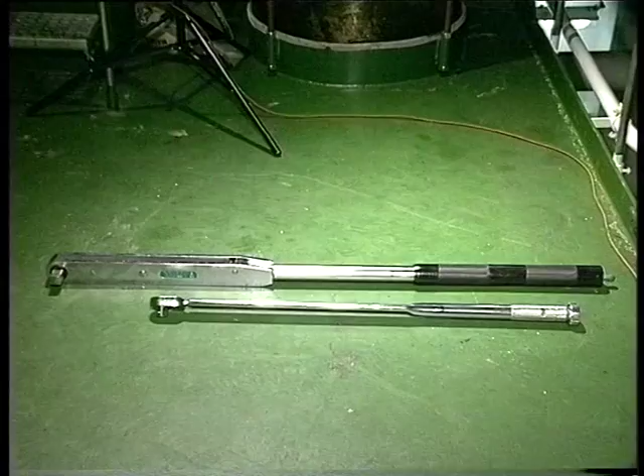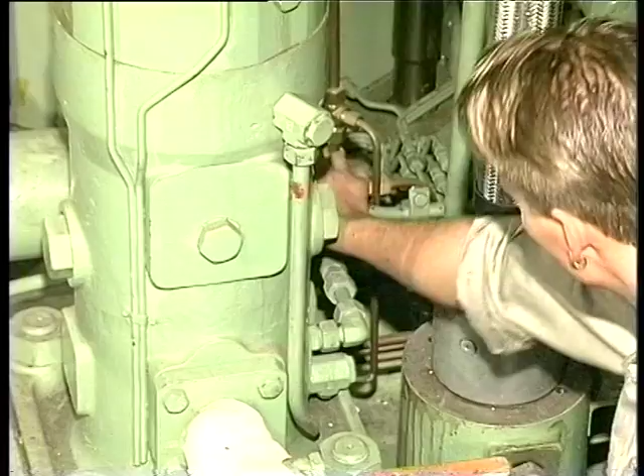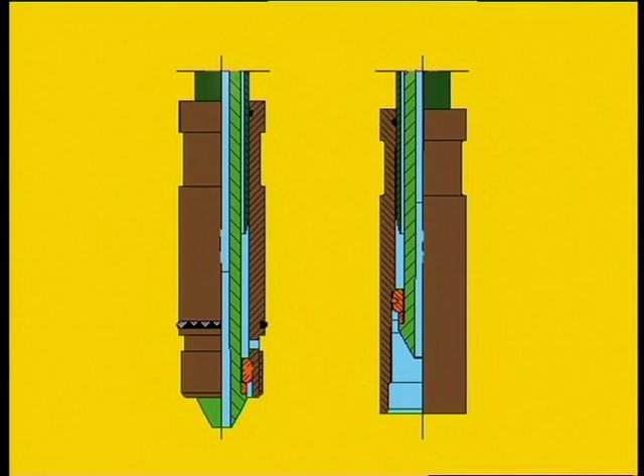Before any dismantling, drain the fuel oil from the fuel oil high pressure pipes. Confirm that the oil flow has stopped before continuing. The fuel oil high pressure pipe may be provided with a protective outer pipe or with flexible steel wire braided hoses.

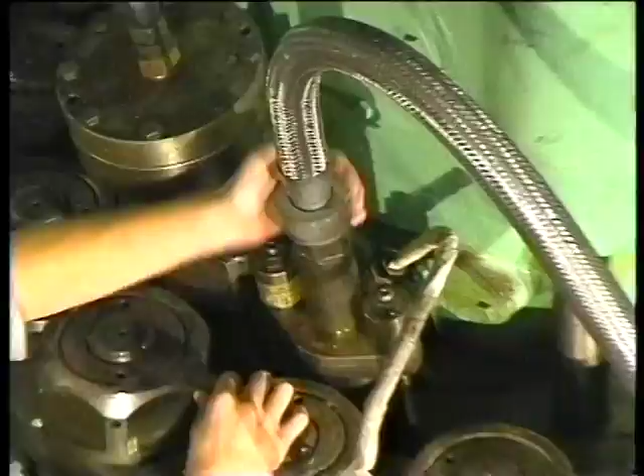See Instruction Book Volume 2, Chapters 901 and 909. Using a hook spanner, loosen the union nut. Using a spanner, loosen the coupling pieces fitted on each end of the high pressure pipe.

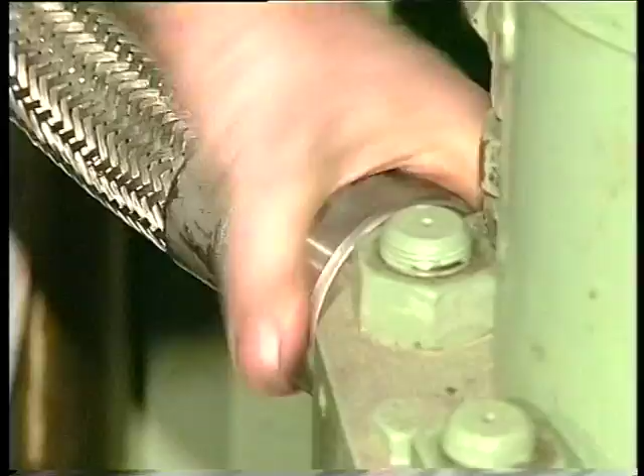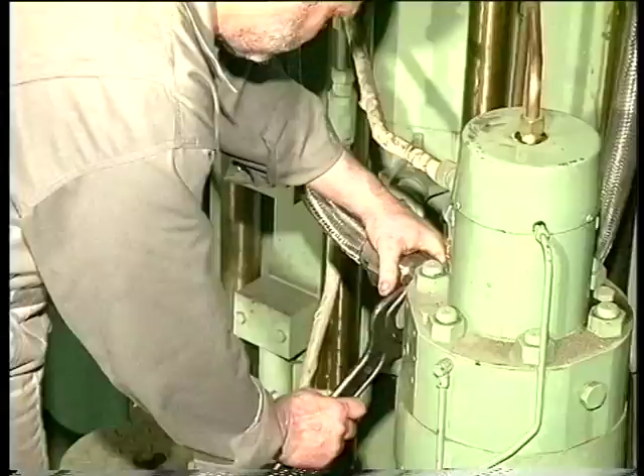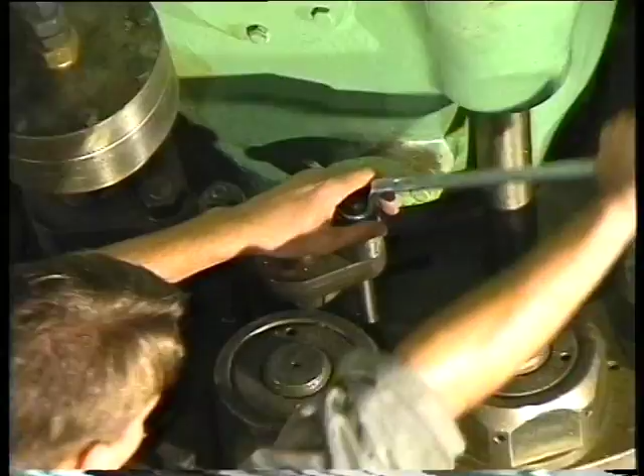Remove the high pressure pipe. Take care not to damage the high pressure pipe seatings. Disconnect the return oil pipe from the fuel valve. Mount protective plastic plugs in or on all high pressure seatings.

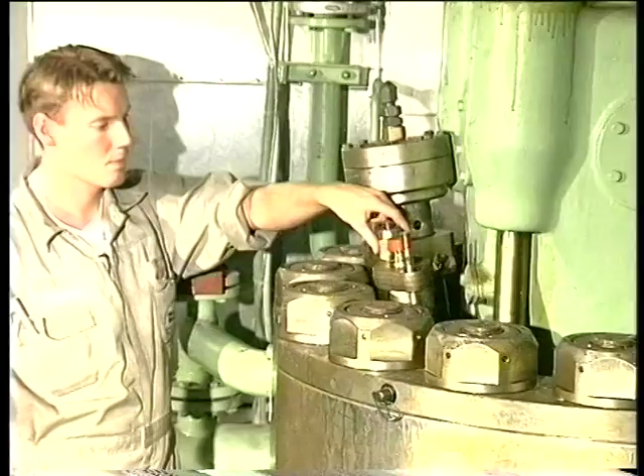Unscrew the retaining nuts and remove the spring housings. Remove the fuel valve from the cylinder cover using the lifting tool if the valve sticks.

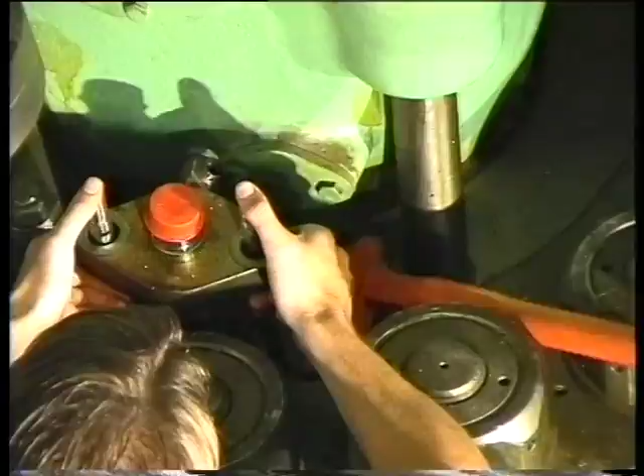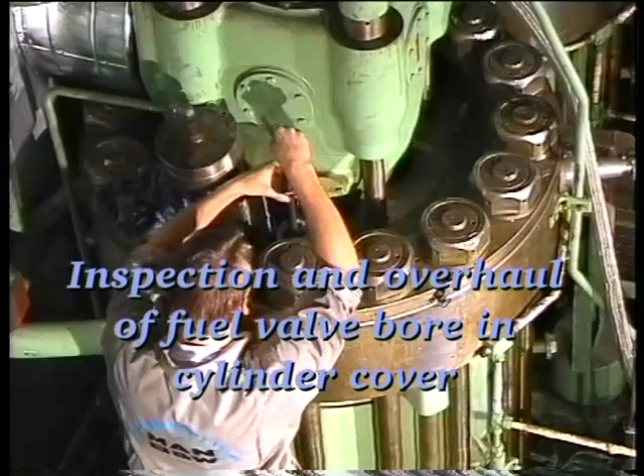Thoroughly clean the fuel valve bore in the cylinder cover. Clean off any carbon deposits in the fuel valve bore with a carbon cutter.

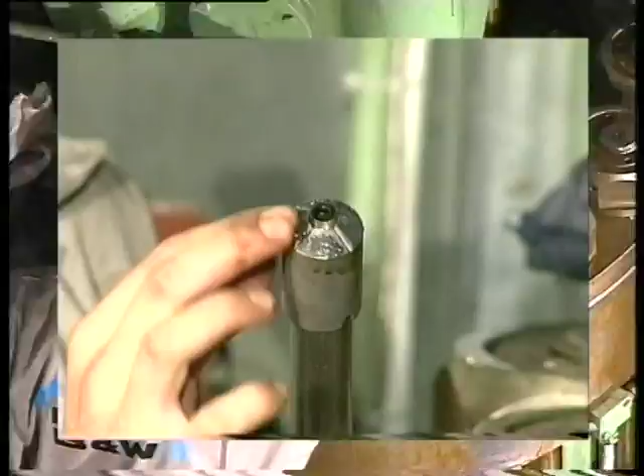If marks are found on the seating in the bore, recondition the seating with a seating face cutter. Finally, grind the seating with a grinding mandrel and a grinding compound, for example carborundum number 200.

After milling and grinding, thoroughly clean the bore and seating and check again that there are no signs of damage on the seating.

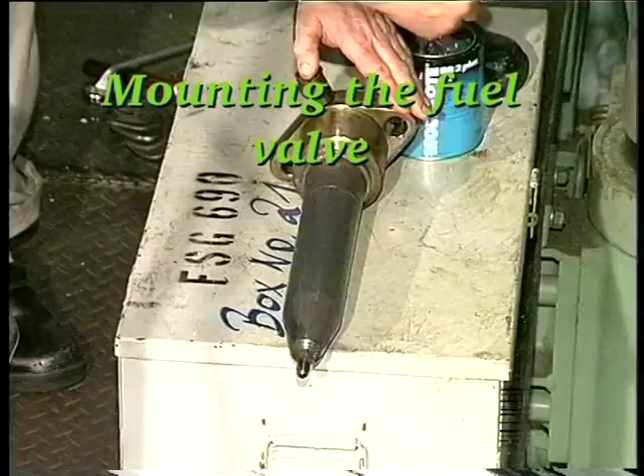After reconditioning the seating in the bore and thoroughly cleaning both bore and seating, fit new O-rings on a new or overhauled fuel valve which has just been pressure tested, and lubricate with molybdenum disulfide. Carefully mount the valve in the cylinder cover.

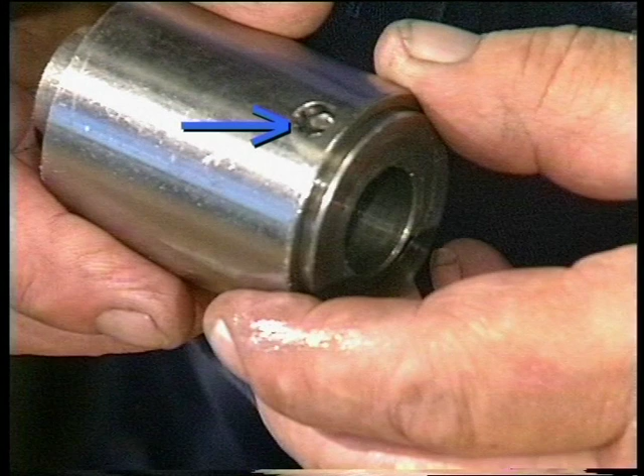To ensure that over-tightening has not taken place, check that the locking and indicating pins have not been bent or broken off.

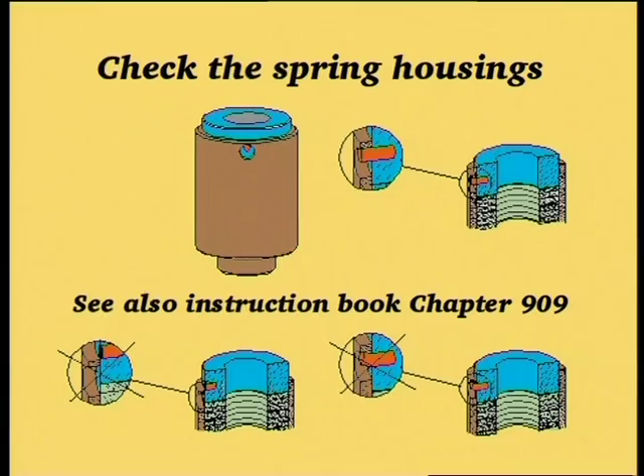In the event of over-tightening, mount a new spring housing. We recommend that the calibration of new and especially old spring housings be checked before they are mounted on the engine or on the fuel valve test rig.

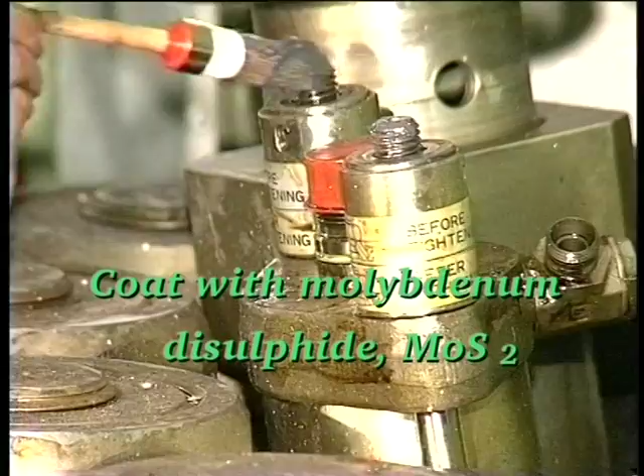Mount the spring housings and retaining nuts. Tighten the nuts until the top face of the pressure disc is flush with the top face of the spring housing.

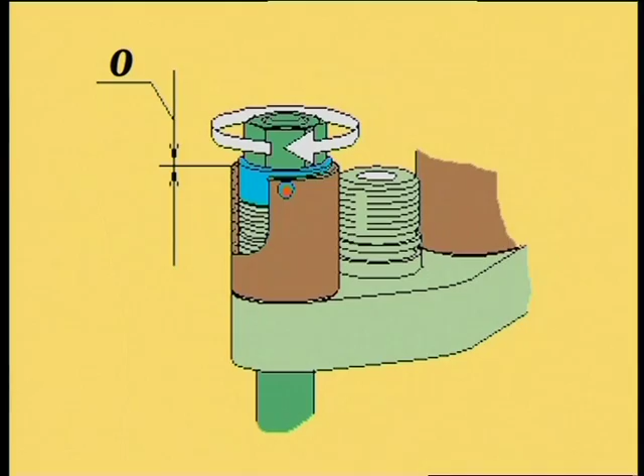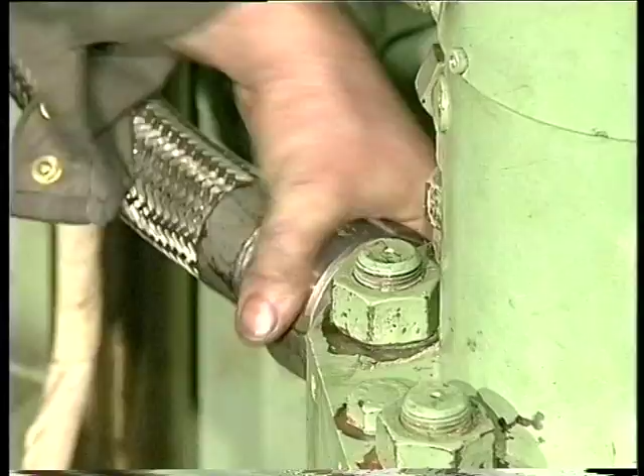Reconnect the return oil pipe to the fuel valve. Using the hook spanner, tighten the union nut. Close the fuel oil drain valve. Turn on the fuel oil supply.

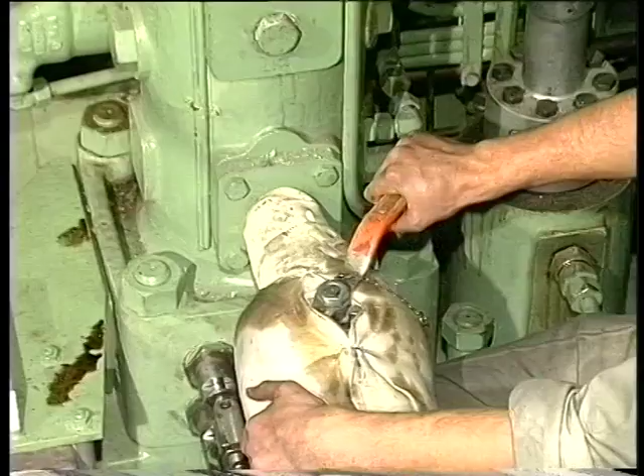Slide type fuel valves which have been in service on the engine must be disassembled and cleaned before pressure testing, as otherwise the results of the pressure testing will be inaccurate. Pay particular attention to the cleaning of the cut-off slide and the nozzle.

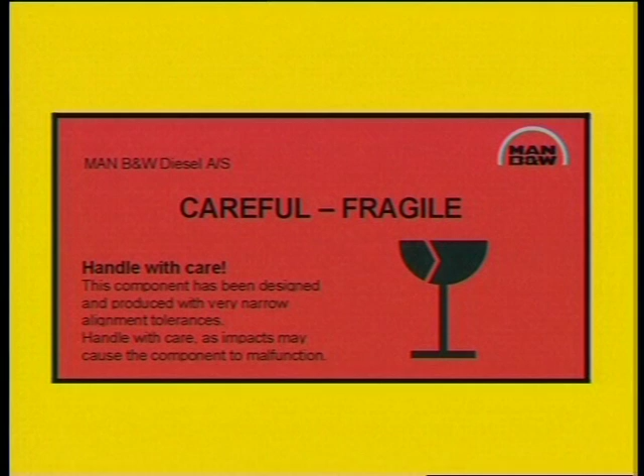When overhauling fuel valves, handle all parts with care and keep them clean. Careful handling applies particularly to the spindle guide and cut-off slide, as any rough handling of these components may cause them to malfunction. Do not clean the fuel nozzle with a rotating steel brush, as this may damage the spray holes.

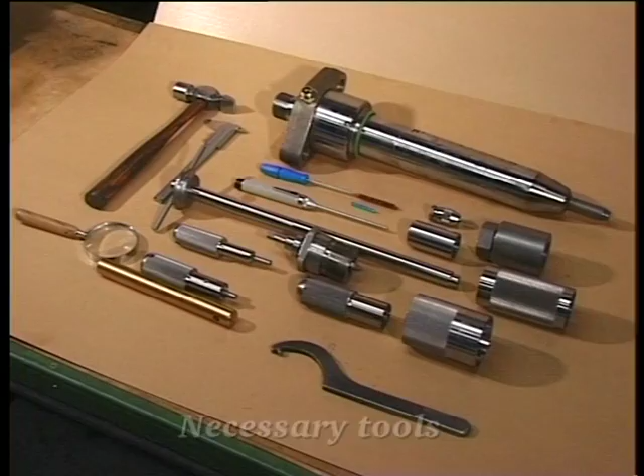Using the special tool, set up the fuel valve on the plane of a drilling machine.

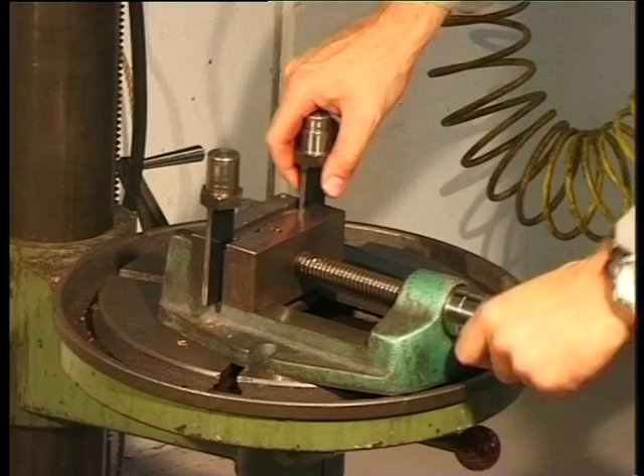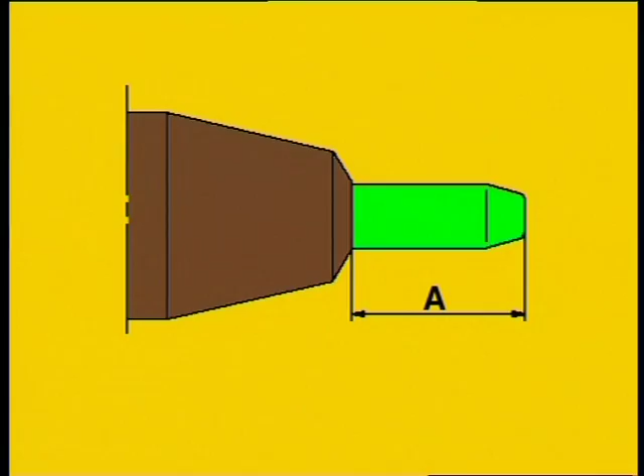Before disassembling the fuel valve, measure distance A, as this measurement is used later during reassembling. Mount the special tool to protect the fuel valve nozzle.

Press down the handle of the drilling machine to compress the spring of the thrust spindle. This will relieve the pressure on the threads of the union nut and thereby prevent seizure. Using a hook spanner, loosen the union nut.

Remove the sealing rings from the valve head and valve housing.

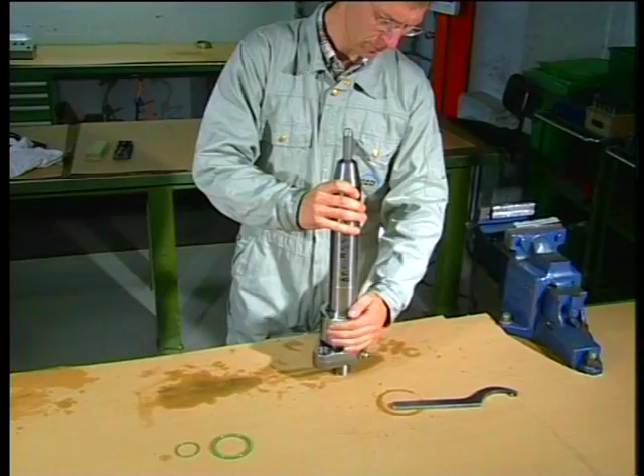Remove the non-return valve, thrust spindle, and spindle guide.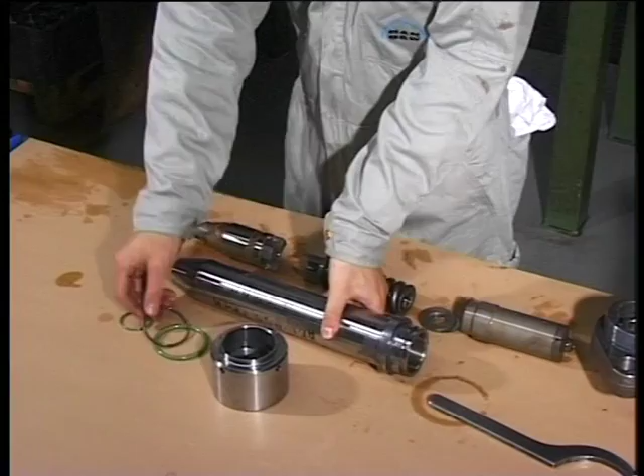Remove and discard all sealing rings. Clean all parts in gas oil and wipe them dry with clean, non-fluffy rags.

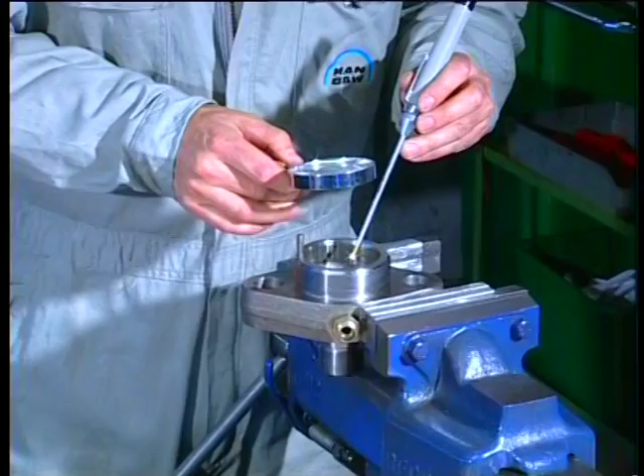Examine all seating surfaces of the valve head, thrust spindle and valve housing. If necessary, grind the seating surfaces with the grinding mandrels and carborundum number 500.

Use the milling tool if more serious damage has occurred on the seating surface for the fuel oil high pressure pipe. Loosen the screw and press the spindle and stop ring downwards. Then retighten the screw.

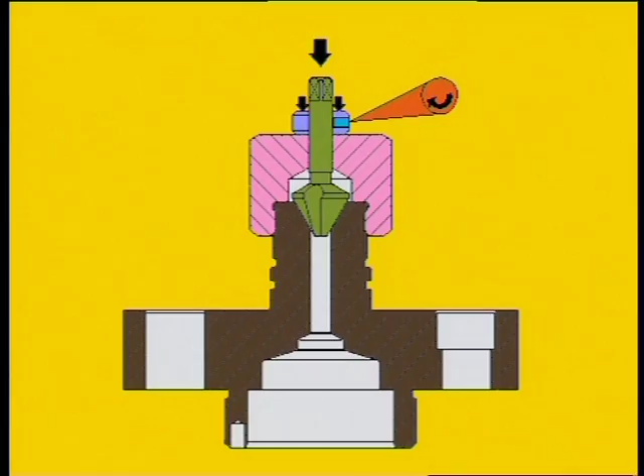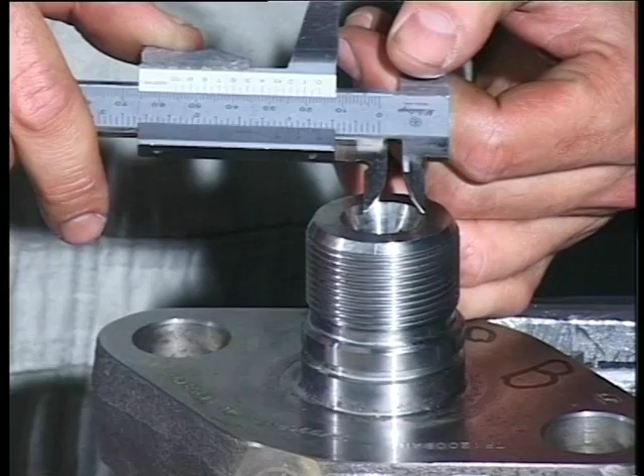The diameter of the seating surface must not exceed the value stated in Procedure 909/6 in Volume 2 of the instruction book.

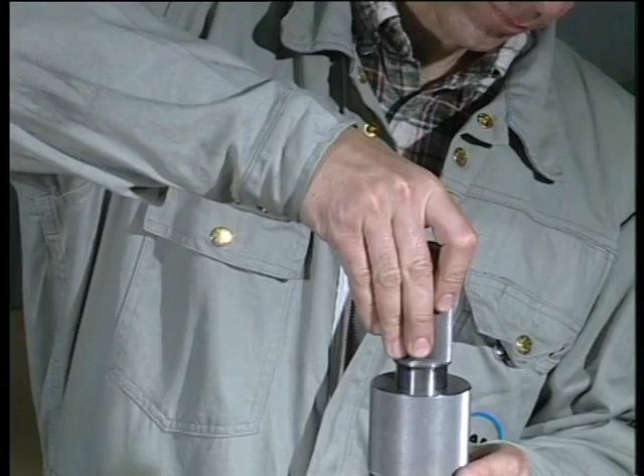After grinding and milling, clean the parts in gas oil and wipe them dry with clean, non-fluffy rags.

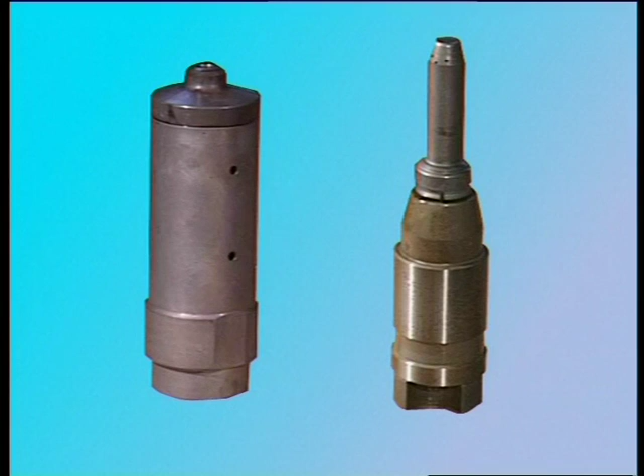The non-return valve and spindle guide should be sent to an MAN B&W diesel service centre or authorised repair shop for overhaul. If this is not possible, the parts may be overhauled as described in the next sequence in this film.

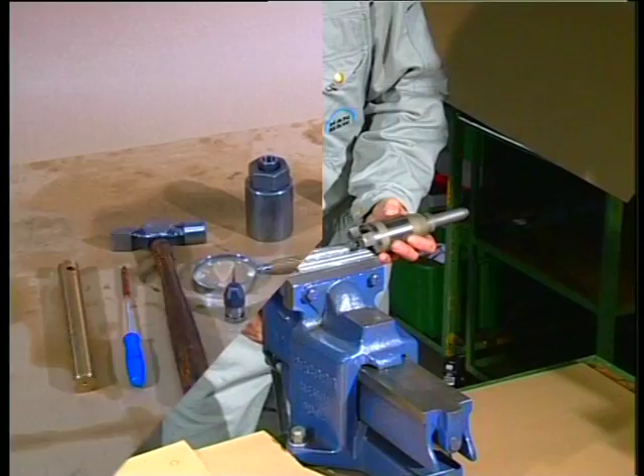Set up the spindle guide in a bench vise provided with soft jaws and disassemble the spindle guide with a brass mandrel and a hammer.

Do not attempt to remove the fuel nozzle before the spindle guide has been disassembled, as such action may damage the cut-off slide.

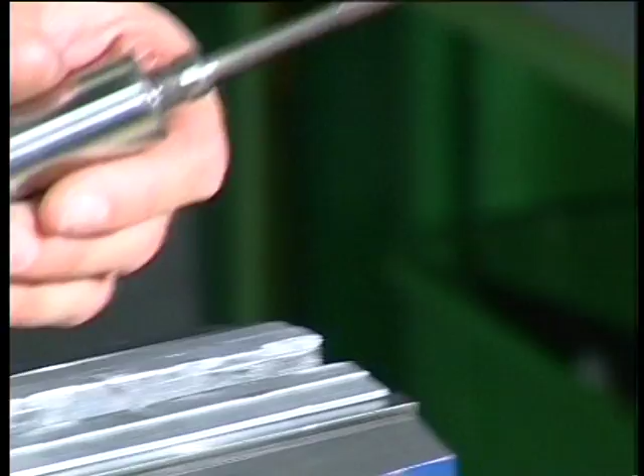The thrust piece, spindle and spindle guide are matched parts and therefore must not be replaced individually. To keep the matched parts together, disassemble only one spindle guide at a time. Dismount the fuel nozzle using the pulling tool.